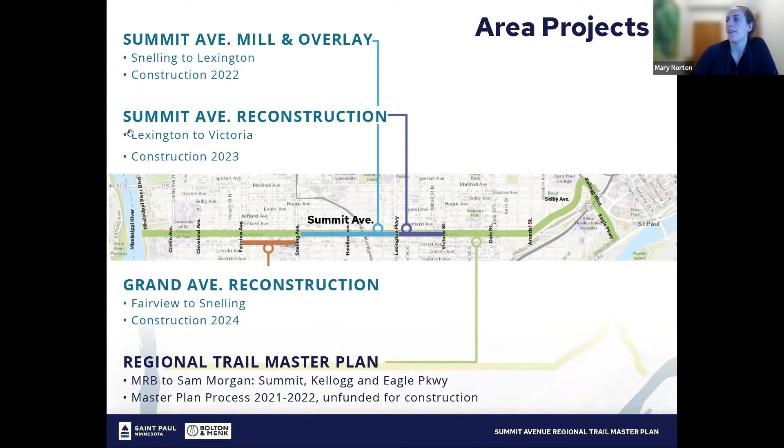Touching a little bit on master plan areas - when we talk about the regional trail search corridor, that's the envelope. We're then dialing in on Summit Avenue itself, and how Summit Avenue is characterized. Generally speaking, the right-of-way conditions for Summit Avenue are characterized by two right-of-way conditions: there's a 200-foot right-of-way from Lexington to the Mississippi River Boulevard.

East of Lexington, we have a 100-foot right-of-way. So two different available right-of-ways that we're working within to chart what this regional trail facility could look like and how traffic and operations are moving in there. But generally, those are the two characterizations of the corridor.

When we break that down further, in that 200-foot right-of-way, there's a single median condition characterized by a really large 90-foot center median. We also have double median conditions - there's a stretch where that center area splits, becomes two different medians, and then comes back together again before it hits Lexington, back to a single median.

So a little bit unique, obviously makes for very unique transitions and things we want to be mindful of as we're designing and making sure that we can create safer transitions through these spaces for bicycles and pedestrians.

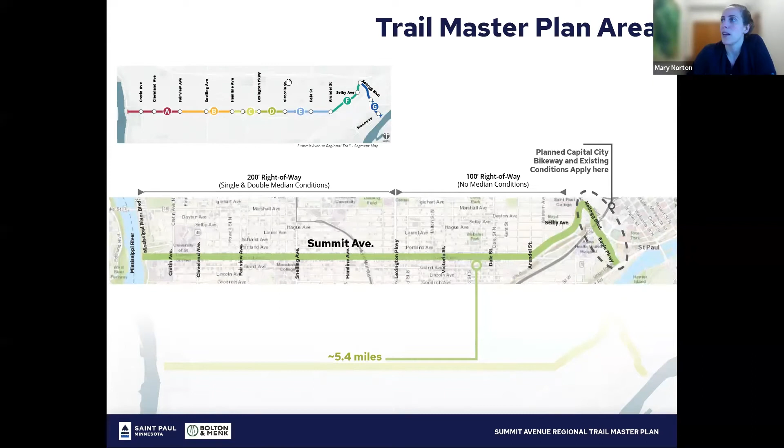It's a 5.4 mile corridor. In the upper left here, when we get to the actual master plan document this summer, when those are under review, we'll start to break down areas by A, B, C, D—that's just a keynote for reference. We won't get quite that granular here today; we'll mostly look at the two different types, 100-foot and 200-foot, but just as a note for when the master plan document comes out, we'll move along that way.

So some of the project goals and context here. As I mentioned, it's a really important link for the Parks and Trails Network in the metropolitan region. We're really looking to balance many of the priorities that exist within Summit—ways to balance needs for traffic calming, safety improvements, and identify how we can also modernize infrastructure and bring a more improved connective space to public open space there. We recognize Summit is an incredibly important place, and we want to make sure that whatever goes in really complements and fits with the historic character of Summit Avenue. So really being conscious about what is planned and proposed, to really come alongside what is great already.

The project schedule: in the fall we kicked off community engagement, and through the winter we've been looking at existing conditions and analysis, and really connecting with stakeholder groups, building our design advisory committee with representatives at various district councils and community stakeholder groups—really identifying where corridor opportunities and constraints are, trying to understand those transition areas and where traffic concerns are, or where we know we need to plan for improvements.

Then in winter and spring, gathering feedback from community groups has been really important. The Engage St. Paul website has been very helpful in understanding where hotspots are, where people see interest in improvement, or where they want things to stay as is, or where we should improve upon that. Now we're really shifting for summer to develop these trail concepts and get feedback, and then get that draft master plan out in summer for public comment. Once we get feedback on it and refine the master plan, we'd be looking to move through approvals this fall.

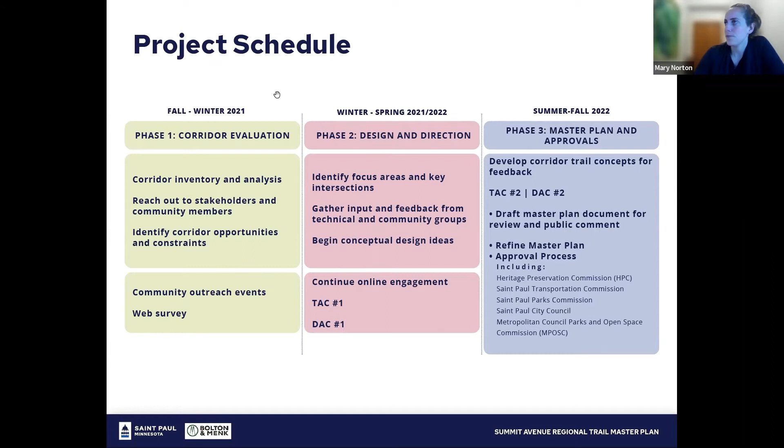All right, touch on evaluation. We'll make sure to keep a little time check—we want to move along here so we can get the conversation going.

There's been a lot of great community engagement that's been a part of this process. We're hearing from many different community members—certainly huge priorities in green space protection and preservation of what exists in the corridor. Really seeing the parkway function as a park experience and the importance of that, making sure that's embedded in this process, and that we continue to complement that as we move forward with design ideas.

Safety: a lot of concern about cars moving too fast, proximity of pedestrians to vehicles, crossings in particular being of concern, and turning movements. Really a desire for more separation between cars, bicycles, and peds, door swing conflicts, and things like that with existing bike lanes. And then a lot of concern about facility conditions—paving the road is a big concern. Surface conditions being poor, and wanting that to be a better experience and increase use that way.

Walkway and paving conditions as well, tripping concerns, things like that. The wider sidewalks east of Dale, that character in the corridor is really highly desirable. The pedestrian realm is really important.

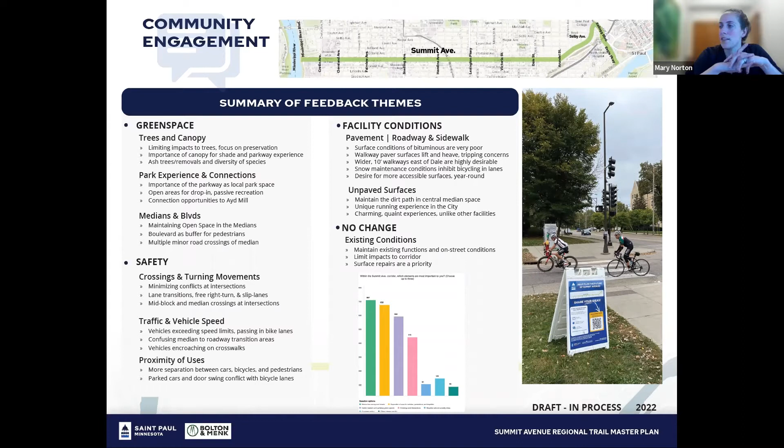And then no change - very concerned about changing the corridor, keeping things as they are. There's certainly an important function to the historical context and the parkway context of the corridor. So making sure that surface repairs are the priority. We're hearing quite a bit from many different perspectives on it. It's a well-loved space, and we want to be conscious of that.

I will touch on some of these hotspots from the online survey, where we're seeing people show interest in improvements or areas of concern. I think in general, safety at intersections is really important.

The value of park and green spaces - spaces that are either currently well used and loved, or ones that are underutilized - where people see Summit functioning as an important connection, creating more opportunity for green spaces and bringing people to those spaces. So connections and transitions too.

For example, the Ayd Mill - a lot of desire to connect to that current or recently designed bikeway, making that a more accessible experience. And then parking functions and conflicts, certainly near universities where there are conflicts with on-street bikeways adjacent to parking, or in between through travel and parking.

So survey participation has been good. I think we have a little over 800 participants in the survey across community members. Again, we'll keep that door open and want people to continue to engage through that. But here's kind of a breakdown of who's participated so far.

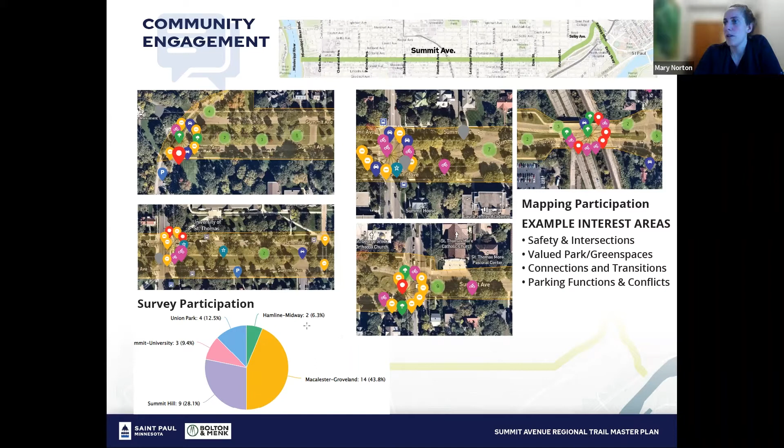A lot of community engagement conversation happening too - huge concern about trees and planting. Again, I want to reiterate that is integral to this process. We certainly recognize the importance of that, and what you'll see in these concepts - we're really moving to keep that as a priority and complement that.

Concerns about traffic and pavement, curb walks, crossings at the median - people going from median to median, so to speak - as a concern. Just a touch point on that. Again, reiterating that green space is integral to the design.

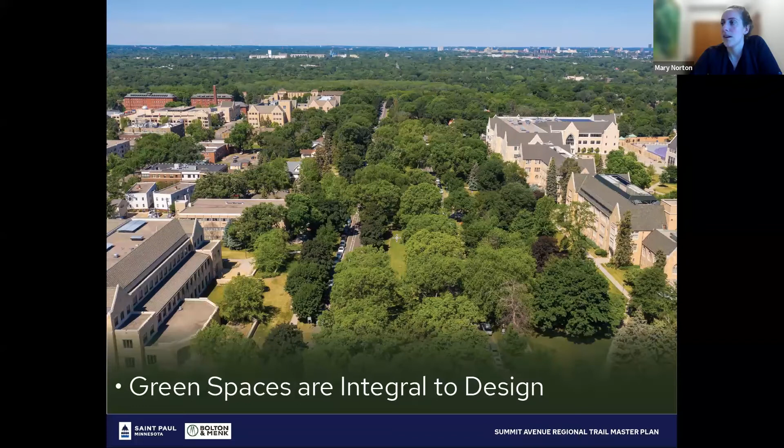What you'll see here when we get to the concepts rolling out is really focusing on the existing paved space and where we can create or reallocate more pedestrian and bicycle friendly facilities, making sure that we're really conscious of that edge and where those edges of curbs are to maintain green spaces and making sure that's integral.

The medians themselves, again those sort of user-driven pathways, have endured time certainly - we've seen that in aerial photographs dating back. I think that's a really important space and will continue to be. So again, we're going to be looking at these paved areas and how they function, how we can bring people up to create more of a separated bikeway, but within that paved surface.

Just to touch a little bit on the historic district - there are two different historic districts spanning Summit Avenue, the West Summit Avenue Historic District and the Historic Hill District. We know that the historic context is incredibly important, and whatever changes are made certainly are part of that.

I'm really looking forward to hearing from our friends on the call from SHPO as well as HPC, who can speak to where these ideas might be headed and how that historical context overlays with this. In our historical analysis tech memo, the grand and noteworthy public street is a factor from early planning.

This is certainly a cultural landscape - we can see that 100-foot pattern and the 200-foot spatial pattern dating back to 1888 in the early layout and Sanborn maps. So spatial organization of land patterns is really important, and we want to be conscious of that.

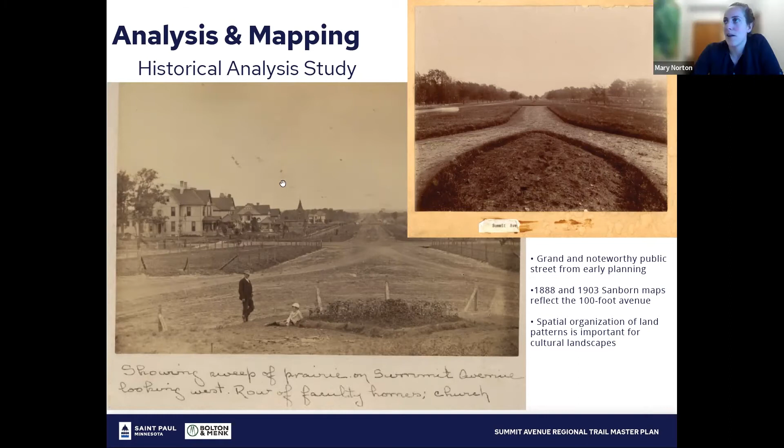Again, just reiterating the importance of the green space in this corridor, the urban canopy. I think the shadows that are created, what this place does to create really a highly desirable park and parkway experience for all modes and users. We want to maintain that and we want to make sure we're complementing it.

Existing conditions, the Ayd Mill Bridge I mentioned as a fairly recent reconstruction in the corridor. And the desire for connections to that as part of planning processes, recognizing an opportunity for bicyclists and pedestrians to connect to other parts of the city.

Touchdown surface conditions and paving. I think this particular image is Lexington to Victoria. So certainly interest in reconstructing and modernizing those conditions where we can. The upper right here, you'll see that kind of 10-foot sidewalk characterization, the beauty and comfort of that 10-foot pedestrian realm that exists east of Dale is highly desirable.

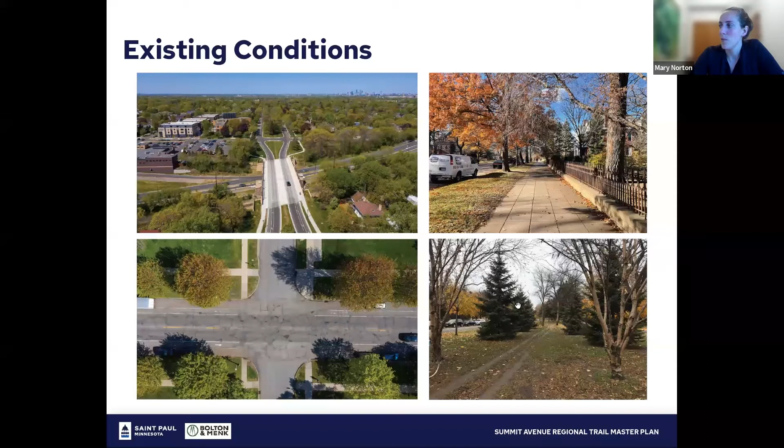And again, those sort of user-driven paths through the park landscape is really important. I'll switch to some of the concerns we've heard from a maintenance perspective, certainly in winter. Summer conditions, it's probably more about proximity, speed of cars and proximity to parked cars.

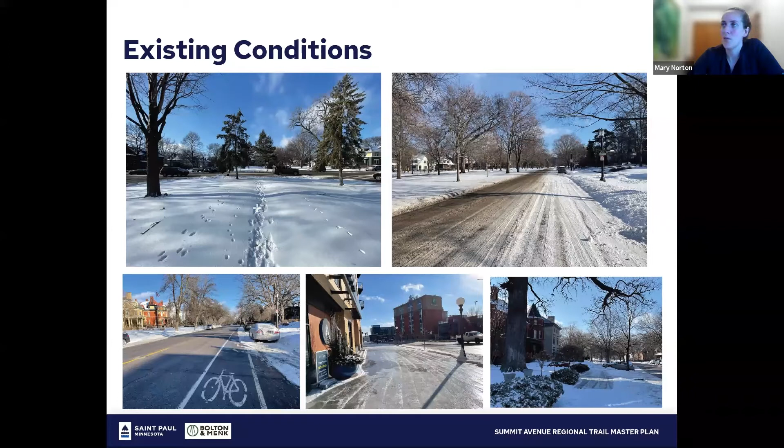But in winter conditions, there's certainly concern of snow removal and being able to utilize these facilities year round for bicycles and pedestrians. And certainly it's used as soon as the snow falls, so people are out, people are moving on it. It's a great community space.

And with that, I want to transition to trail concept evaluation objectives. So we are really trying to seek a balance of many different objectives in the corridor. There's a lot of competing priorities, of course.

A large priority is to increase pedestrian and bicycle safety and create a comfortable trail experience that can really be an all ages facility, kind of meet that 8 to 80 need for bicycles and pedestrians to be able to enjoy Summit Avenue and enjoy that parkway corridor.

So we really want to support it. It already is a high quality experience in this corridor, and we want to make that a high quality regional trail experience as well, making sure that whatever's proposed is compatible with historic context.

Where you're going to see in these concepts where we're starting to have challenges in design, or beginning to weigh a little more, are these impacts to vehicle parking and functions.

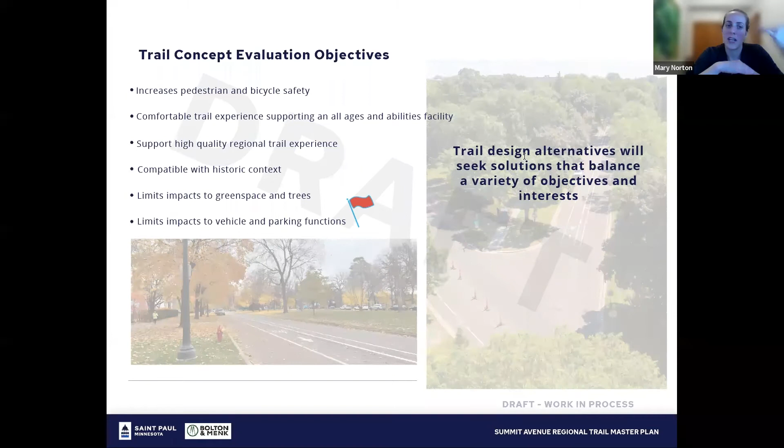You'll see that kind of play out in the concepts and in options where we have an option to retain some parking and an option to remove parking in select areas to create the trail space. So you'll see that play through, but again, really trying to seek that balance of meeting as many objectives as we can and minimizing impacts where we're able to.

A little bit deeper dive on parking. So another study, in addition to some of the historic context that was studied earlier this year, is a parking evaluation. There are actually 2 studies that have been done at the city relative to parking. One as part of the master plan, and one earlier in January 2020 that predates the master plan.

That was an overnight parking restriction study. This was in response to a study for improved roadway maintenance for facilities on Summit Avenue. This looked at corridor-wide parking and hours collected.

Again, it was an overnight parking study, so 12 a.m. to 6 a.m., in July through September, on 6 different occasions, kind of looking at general utilization rates.

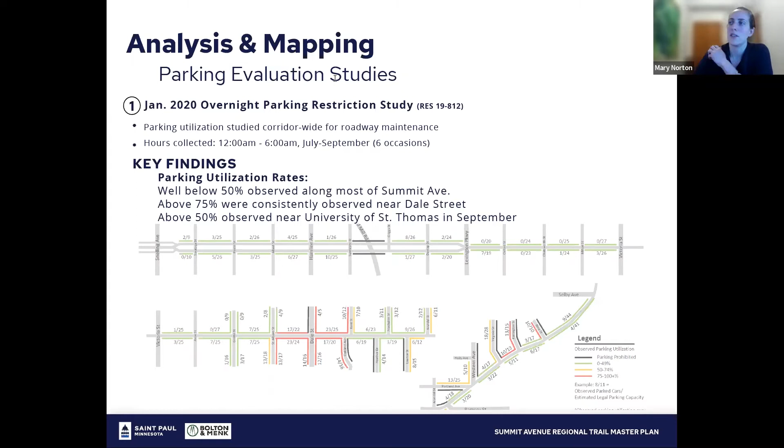Overall, parking utilization for this overnight study was observed well below 50% along most of Summit Avenue. It was consistently above 75% near Dale, and then above 50% near University of St. Thomas when school was in session. So a few different snapshots of utilization corridor wide.

The second parking study was an analysis specific to this master plan, where we took another look, especially in the 100-foot right of way where we know we're most constrained. We wanted to see a snapshot of parking and utilization. So parking utilization here looked at Lexington to Selby.

8 different collection times occurred as part of this study, and key findings were that in this part of the corridor utilization was generally modest, probably averaging about 30% over the whole study area. Consistent with the previous study, the area near Dale was consistently a high usage point.

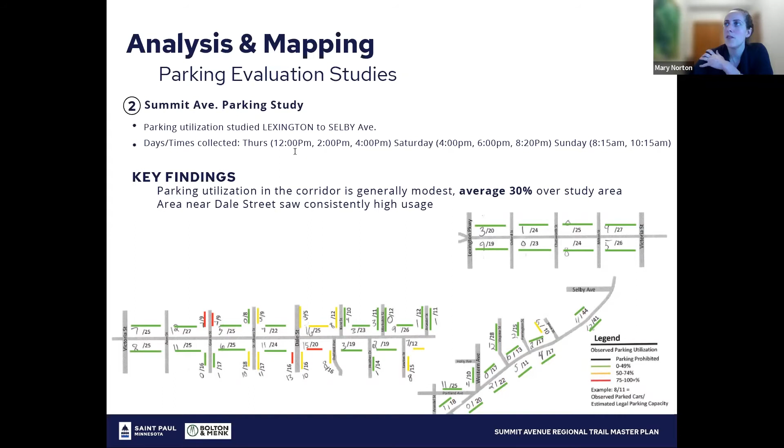So given those preliminary studies, we're starting to look at these paved surfaces and how we can prioritize green space and preserve that mature landscape. I think that's something really important about Summit Avenue that may be different from other places. There's a lot that's amazing and different about Summit, but the mature landscape features are really important as we start to look at those curb edges. We want to be conscious of minimizing that movement because of mature landscape and critical roots, so that's a big priority.

We're looking to reallocate existing transportation spaces so that we can provide a separated bikeway and walkways as part of that regional trail facility to serve bikes and pedestrians.

A key component to all concepts you'll see today is the idea of retaining parking on both sides, or potentially removing it on one side, and what that could look like. The other key piece is two different trail styles, each pretty different. One is a one-way style trail facility, complementary to what exists now on street, but brought up above the curb to provide more separation between vehicles and bicycles.

So the one-way trail style facility—excuse me, let me find a glass of water. The one-way style is looking at how that shift would occur. What you see here on screen is in that 100-foot right-of-way, our narrowest right-of-way condition. That shift could occur potentially on one side, or 50%, so to speak—it doesn't necessarily have to be all on one side. The traffic could work so you have a break mid-block and are able to transition those facilities as needed.

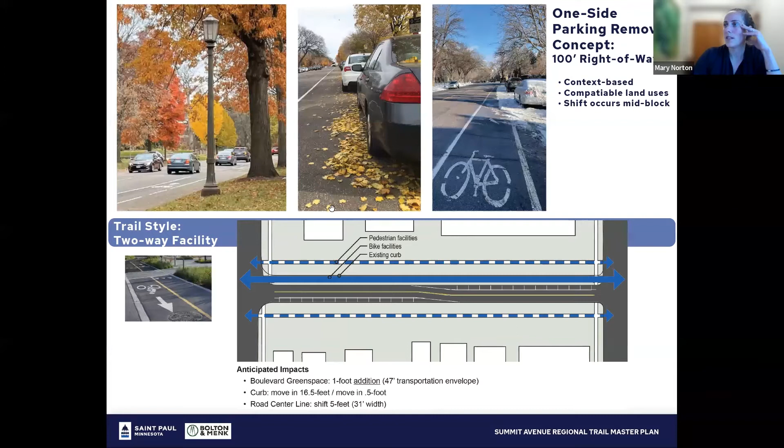So it's a context-based approach to parking or reallocating parking. The one-way style shows two one-ways, or a paired one-way style facility, similar to what's out there now. The next one, the two-way style, is a little different: both bicycle directions are on one side, and the sidewalks remain as the pedestrian facility. The same strategy could be used for parking to chicane throughout that section.

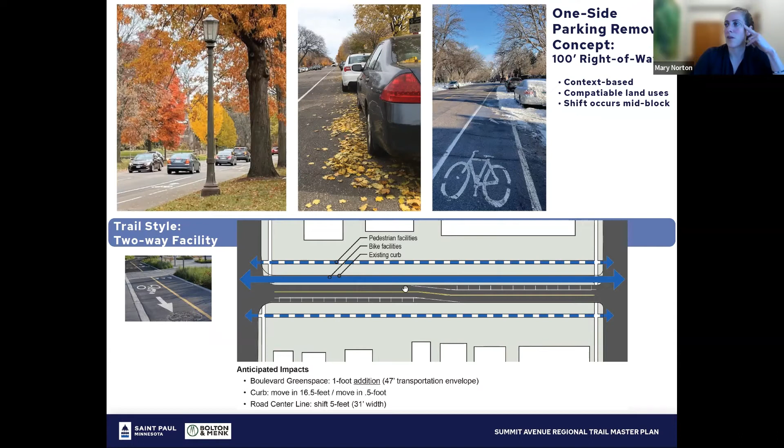It's worth noting this is a diagram, but this wouldn't occur on every single block—you could span it as needed. It's more of a context-based look that could occur relative to where parking needs are to be met. So that is that concept, and with that I'll shift to the conceptual bike trail alternatives we're looking at.

There are two different facility types you'll see play out: the one-way style facility type and the two-way style facility type. We'll run through the 200-foot right-of-way first—that's the area with the large medians and double medians. So let's look at existing conditions in that 200-foot right-of-way. In the upper right there's a key marker of where these conditions exist in the corridor, and then we have a generic space here representing that 200-foot right-of-way.

Zeroing in on these one-way roads, framing that center median space, we're looking at this paved area and how we can reallocate it to create trail space.

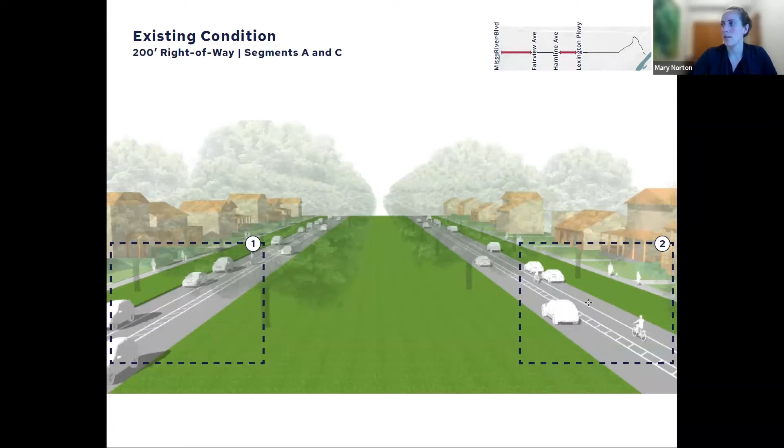In existing conditions, we have an on-street buffered bike lane between parked cars and a through travel lane, but there's sufficient area to create a buffer for the bikeway on street. You'll note in the legend on all these graphics the existing curb line and the potential impact zone—that's where we're thinking about those curb edges and how each facility type moves and adjusts them. We want to minimize that movement as much as we can, but also need to create a trail facility that's comfortable and meets design guidelines, as well as roadway design guidelines for parking, through travel, and emergency access.

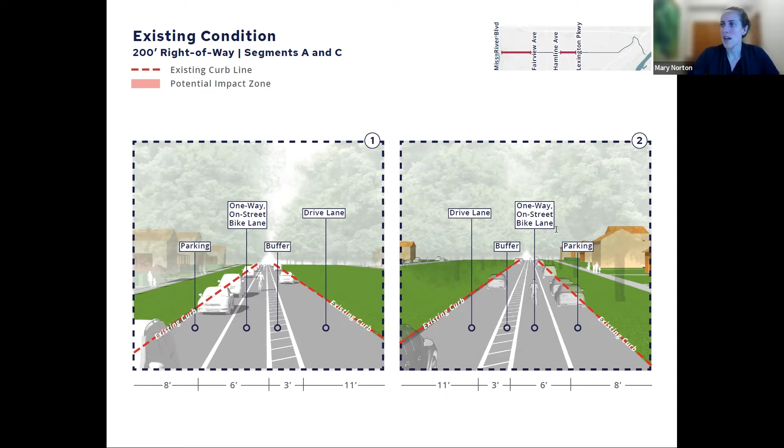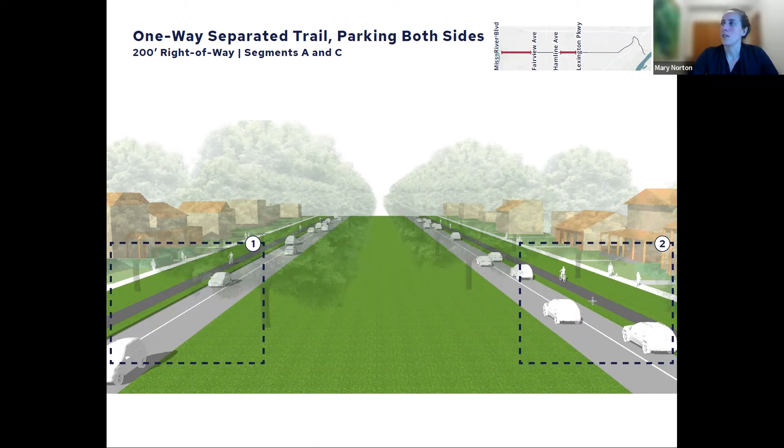So here's the one-way pairing in this section, an example of a one-way separated trail with parking on both sides—keeping parking and roadway functionality as is, and introducing a one-way separated trail on either side, as reflected here in area 1 and 2, with the center median. Our impacts will start to show in red; they vary, but generally this particular style would be looking at 1 to 2 feet of impact. I'll say too, to my colleagues, feel free to jump in if I miss something or need another sip of water.

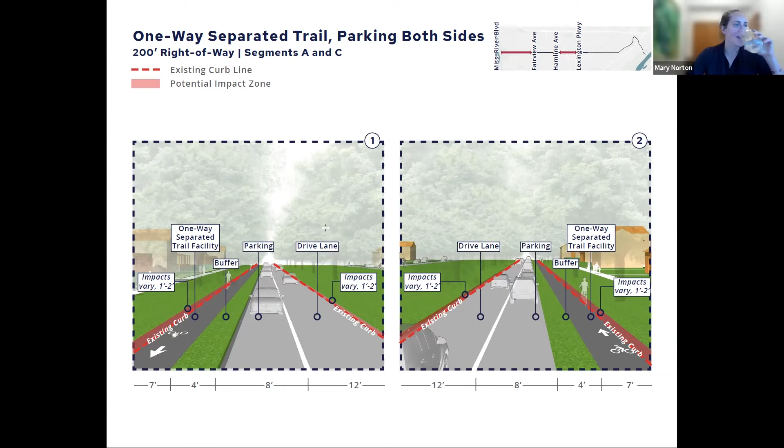The next one we'll look at is a two-way separated trail with parking on one side. We have that same 200-foot right-of-way. So functionality remains on one side, but it looks at removing parking on the other side, maintaining those existing curb lines. What's interesting about this design is it provides an additional green space on one side and maintains the existing curb lines as is—a little bit different style or functionality.

Something that's going to repeat in all of these standards is a buffer. We need about a 4-foot buffer for maintenance on all of these, so you'll see that edge called out as a buffer. It can vary depending on if we have space—we can make it wider—but at least 4 feet is necessary for maintenance.

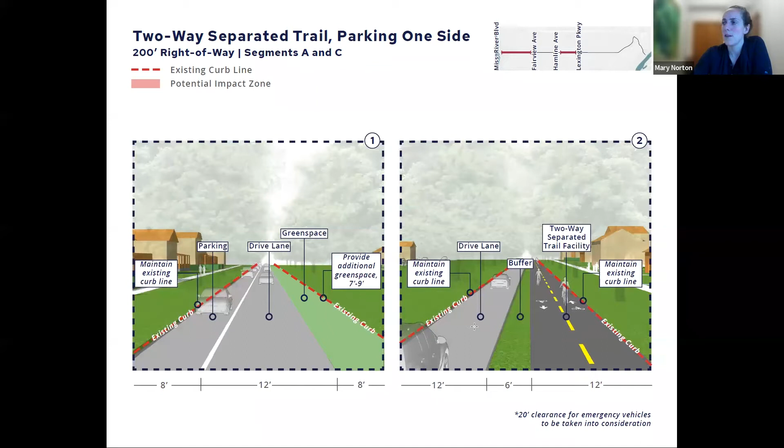All right, 200-foot right of way. Now we're looking at the double median. This is the situation where we have the large 90-foot median, and then it splits—we have those unique transitions where through traffic comes through the middle of the medians and we have frontage roads on the outside. We'll share what those facility styles look like here. Your main through travel is between the medians.

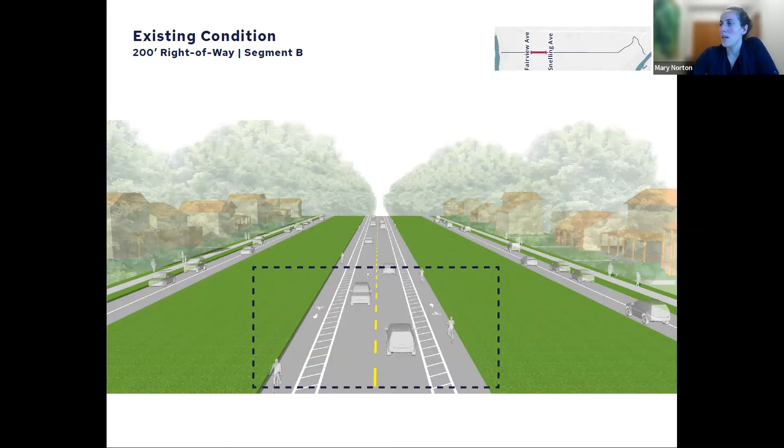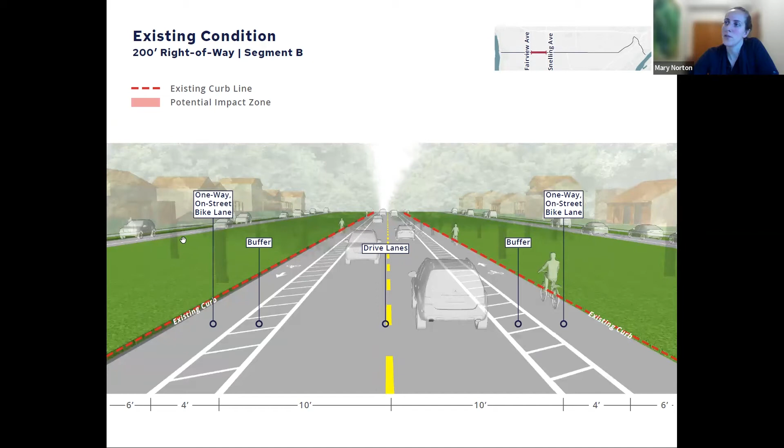Current conditions are on-street bikeways. We do still have those buffered bike lanes, held tight to the curb. Parking does not exist in this center area, however it does exist on the frontage roads in this particular segment.

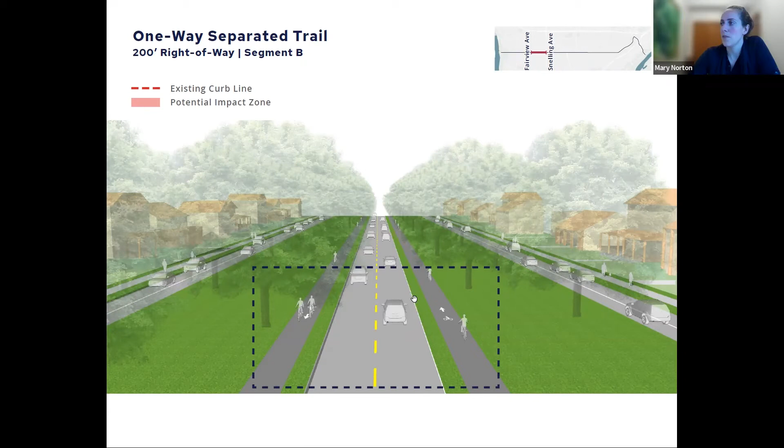Looking at a one-way separated trail with a 200-foot right-of-way, we have similar functionality to what is there now, but bringing those spaces up above the curb and providing more separation from vehicles. These are shown at about a 7-foot width, partly for continuity of the recreational style facility, since many riders like to ride side by side or need room for passing.

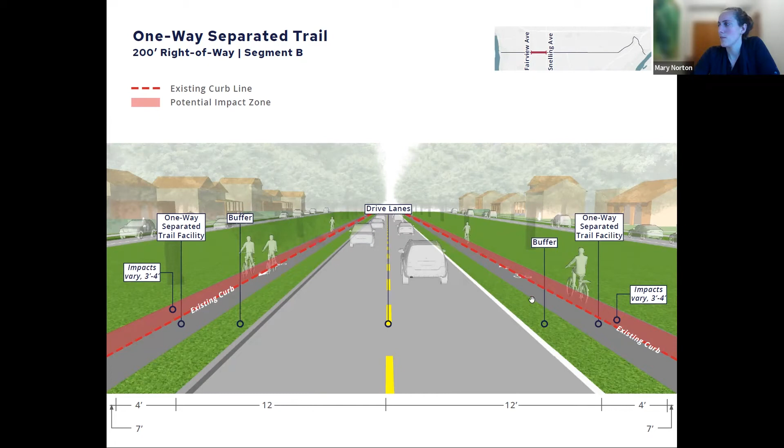With this one-way style, we start to see impacts of about 3 to 4 feet on either side while maintaining that 4-foot buffer. Don't worry if all of this isn't sinking in—it will be on the mural board, so we'll dive in a little further, but I want to give folks a preview first.

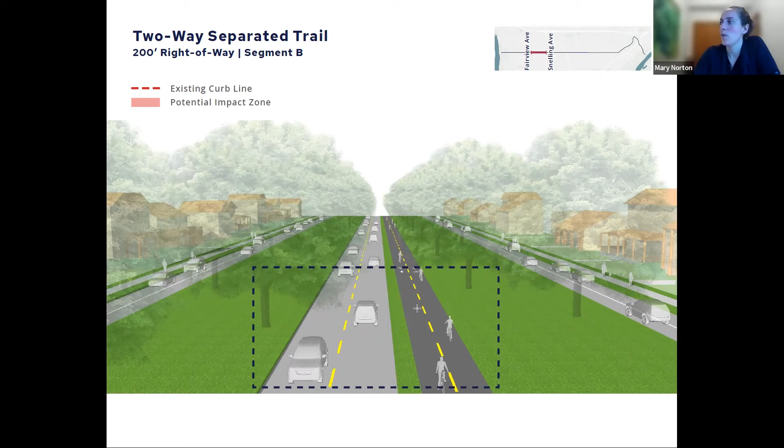So the next one is the two-way style facility, the two-way separated trail—again focusing on that center area, but bringing all uses pulled to one side within that center space. What we see here, because parking isn't present, is we can shift those drive lanes over, create a buffer, and have a two-way trail while maintaining our existing curb lines to work within that envelope.

The 100-foot right-of-way—so from Lexington Parkway to Kellogg Boulevard. Here's where we start to narrow down. We're beyond the median; we don't have a median here. We'll start to take a look at what those one-way and two-way style facilities start to do.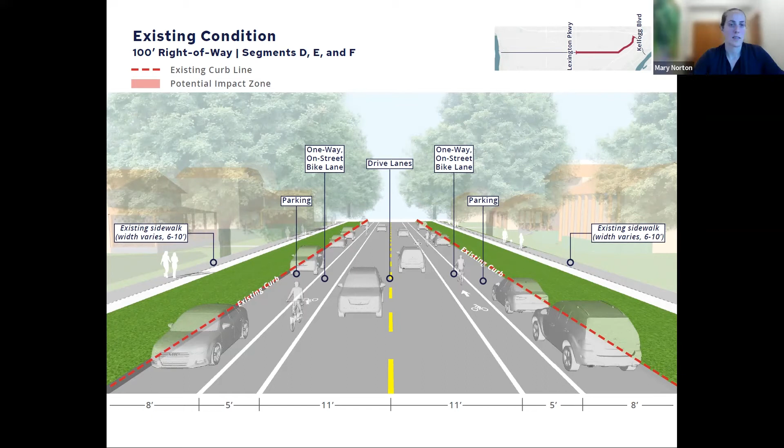Existing conditions—here's where our striped buffer that exists on the others does not exist. We have our 5-foot on-street bike lane between parking and through traffic. It's worth noting that the sidewalk varies in this stretch: east of Dale we have those 10-foot walks, and west of Dale it can be 10, but primarily is a 6-foot walk. That's important to note because those pedestrian realms are certainly part of this regional trail facility. We're just focusing right now on the bikeway design and where improvements can be made.

The one-way separated trail—how that would overlay here—you can see parking on one side, so one side of parking, or that chicane can occur, but about 50% of the parking, so to speak, would be removed and maintained on one side. Impacts vary with this one-way style facility from 2 to 3 feet, and again that same buffer exists here.

This next one is not recommended due to potential boulevard impacts, but we want to share it for the sake of the items we're looking into and how it would overlay. This is maintaining parking on both sides, which starts to get more significant impacts to that curb edge. Again, reiterating the importance of that curb edge and making sure we're minimizing how much that's moving—this starts to get into 6 or 7 feet. It's not recommended because we're dealing with a mature landscape and want to minimize that curb movement.

So that's what a one-way style would look like if parking remained.

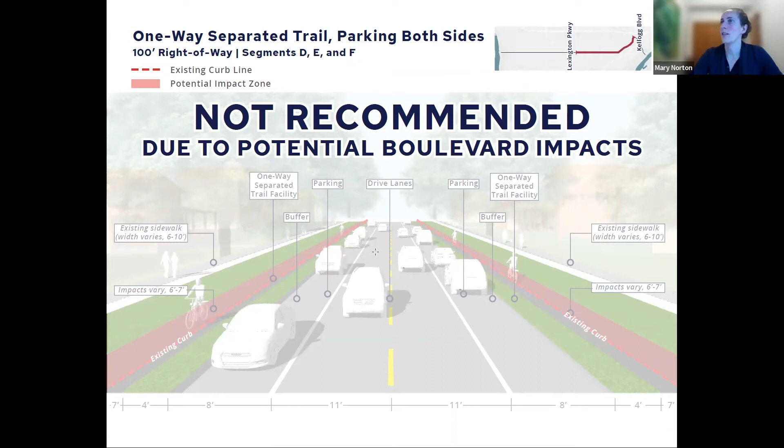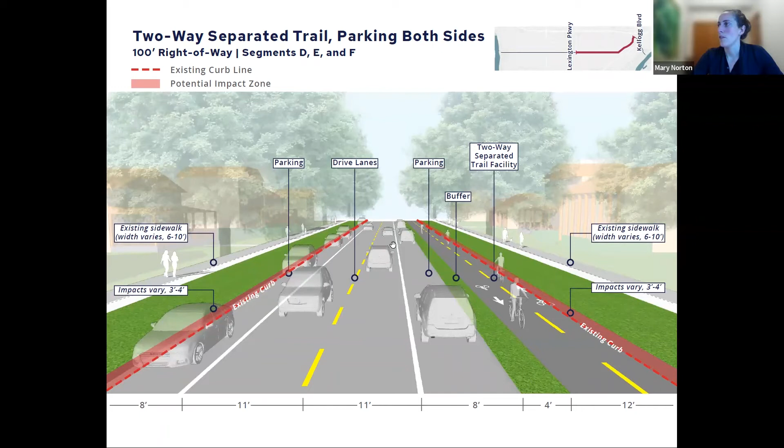The two-way trail, keeping parking on one side, we're able to create again a buffer, a two-way facility, but maintain the existing curb line. And then if we keep parking on both sides and have a two-way style facility, we have lesser impacts to that curb edge. We're more in the 3 to 4 foot realm to be able to keep that functionality and maintain parking.

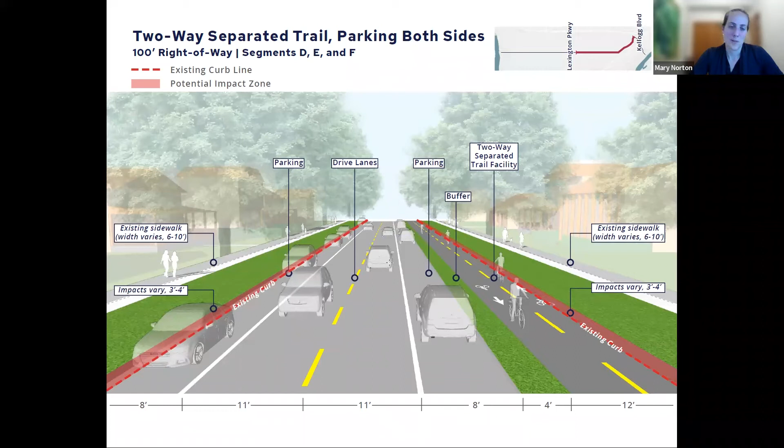I know it's a lot of content, but again those will be available in the Miro boards and our smaller groups. We'll start to look at that and talk through the benefits and drawbacks of all of these as ideas and just hear what people think.

So with that, I think we're going to structure it into 2 main groups. We'll keep the 200-foot right-of-way folks together. That group will be led by myself, Cody, and folks will be there, and then Scott and Katie will be in that group facilitating conversation. The 100-foot right-of-way will be characterized by Brett, and Maddie will be leading the way on that one. So we're going to have 2 big conversations.

I believe it'll automatically split, right, Michaela? Yep, correct. Once you're ready, I'll open all the rooms and everyone will automatically be put into their breakout room. Okay, that sounds good. So we'll do about 30 minutes or so. We could probably run a little longer since we're going to have two rooms. We were going to do 3 at one point, but Michaela will be our friend and jump in and help us make sure we're on time and keeping us rolling.

So with that, I will see folks on the other side in group A. And Brett and Maddie, you guys will see folks in group B. And then we'll come back to the main space and we'll all report out and share what we learned.

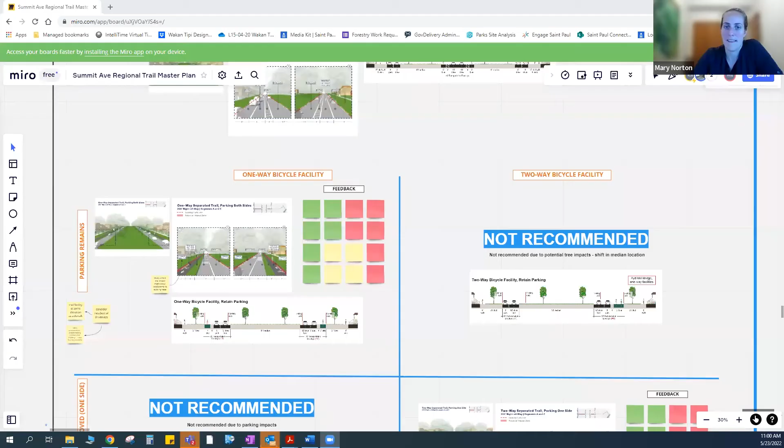I know we didn't get a volunteer in our group to report out, at least at this point. Last call, anyone from group A that wants to summarize the high points we talked about? If not, I'll play that role. All right, fair enough. Okay, so in group A, we were talking about here — I'll share my screen here shortly. All right, so everyone see that okay?

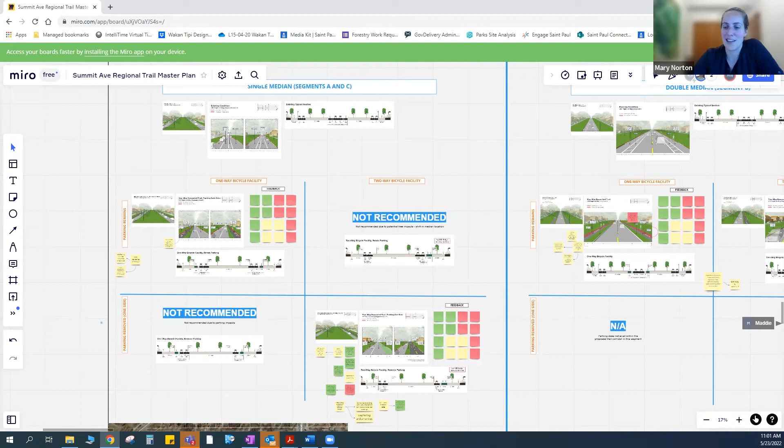All right, so group A, we had a great group. We were talking, we didn't make it all the way to the 100-foot right of way. Unfortunately, we were working through the medians and all that good stuff. But I think some similar themes emerged.

So on our one-way bicycle facility, as we looked at the median spaces, we talked a bit about those relationships to the curb. Forestry brought up that certainly east of Lexington, we have a little tighter conditions or more mature landscape — the specifics aren't there, but something to be conscious of east of Lexington. The consideration of residential driveways, so how these trail facilities would function at driveways, and where we would have more potential conflicts in those scenarios would be with a two-way style facility. So from the different types of facilities, when you have counter traffic, that was flagged as maybe a less desirable situation from the traffic flow perspective, the two-way facility.

Let's see, what else? I'm chasing our post-it notes here. We had a lot of good conversation around the two-way style facility.

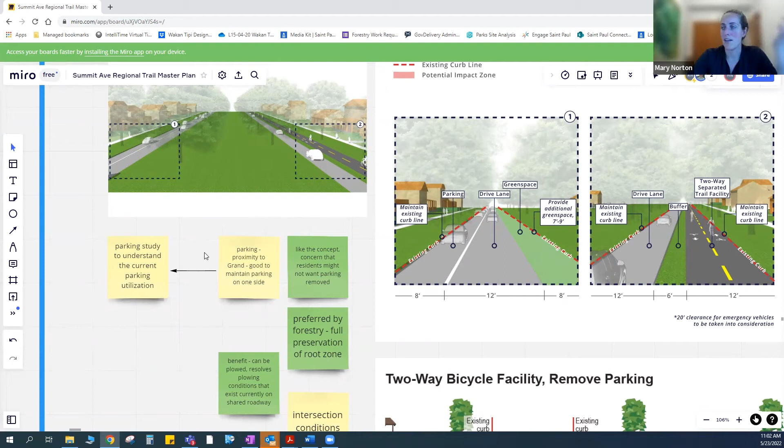Understanding that parking is really important, and parking proximity to Grand is important. It sounded like it was a good thing that at least some parking functionality is maintained in all these concepts. It's not necessarily an easy situation, but eliminating it entirely would be very problematic.

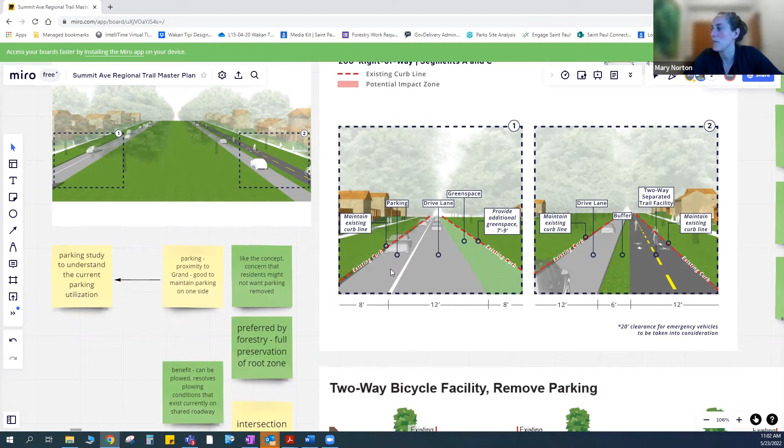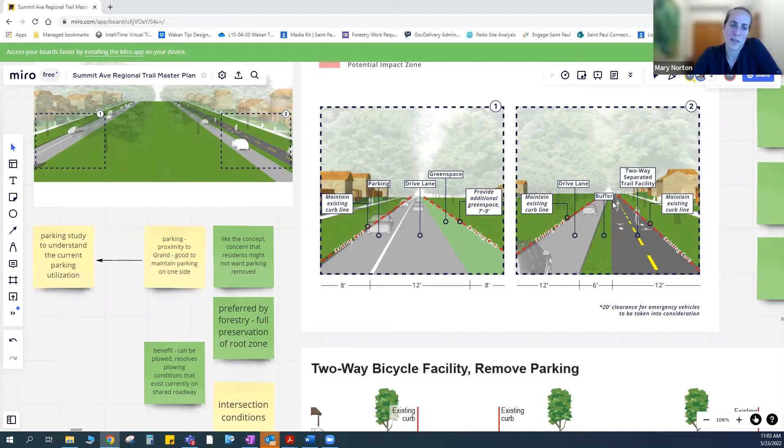What else? We talked about the benefits of the regional trail facility being maintained year round versus what exists currently, and then creating more space or more separation, that buffer space we talked about a little bit.

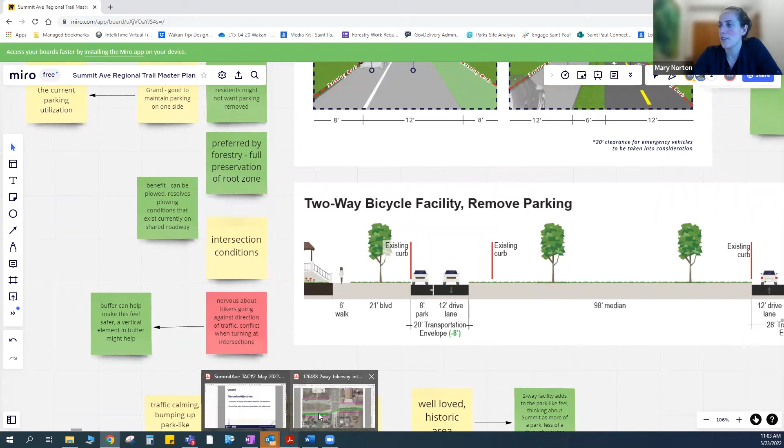Again, kind of nervous about biking against traffic. So going-in-traffic conflict was something we took a look at in general, kind of how a two-way style facility could function.

Is that showing up on screen, by the way? Okay, there's kind of a traffic diagram. So we looked a little bit, we don't have one of these illustrated for the one-ways. The one-ways would follow similar transition patterns or function patterns that are there currently.

So just trying to understand, if we were to push a two-way trail facility to a side, how that would transition, especially in areas where we have a large median to a double. How would that improve crossing conditions at Snelling or other transition points in the corridor? Lexington being the last one we looked at, pulling that over and bringing these together on one side and creating a designated crossing there.

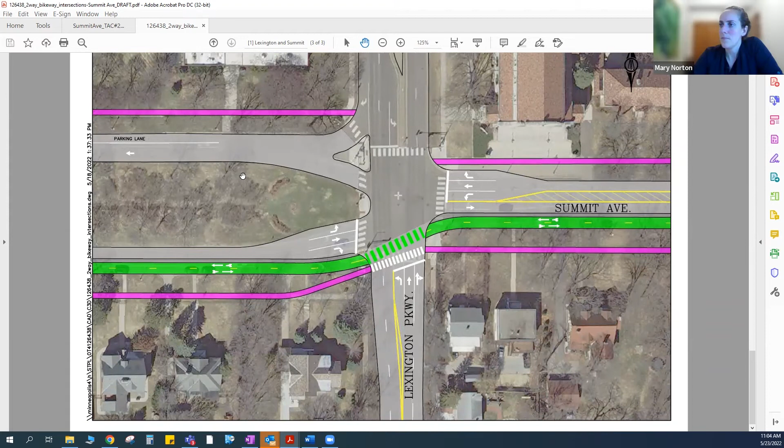So I'll jump back to the Miro board. I'm trying to think of anything else.

And then at the end, Karen, thank you for speaking to that interest in the park-like experience and the potential to close unsignalized crossings and really connect more green spaces together. The importance of it being a well-loved historical area, and really bringing that park, people-first experience back to the corridor, was something people were interested in.

Anything I missed for my group? Anyone want to chime in? Some of the high points?

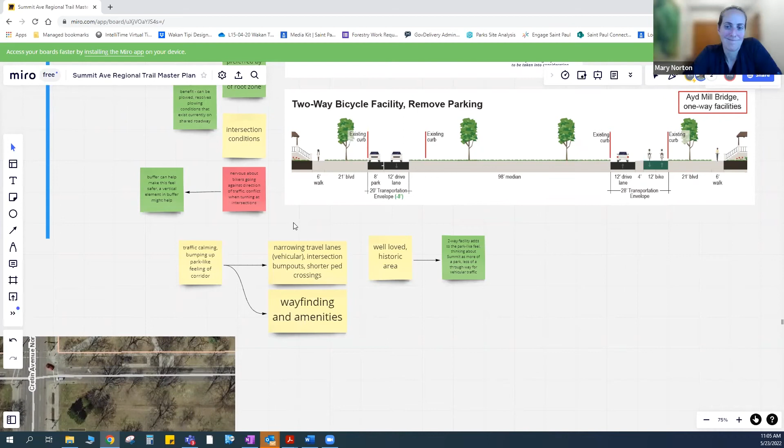All right, and with that, I'll turn it over to Group B. Share what you learned in Group B. Sure, this is Jimmy. I have some notes here, but rest of the group, feel free to jump in.

We started looking at the 100-foot right-of-way. I think in both the 100-foot and 200-foot, Capitol Region Watershed liked the two-way because of its limited impact on green space.

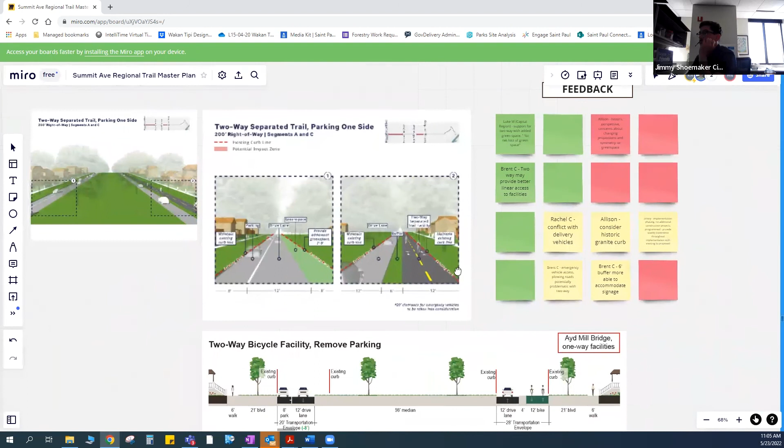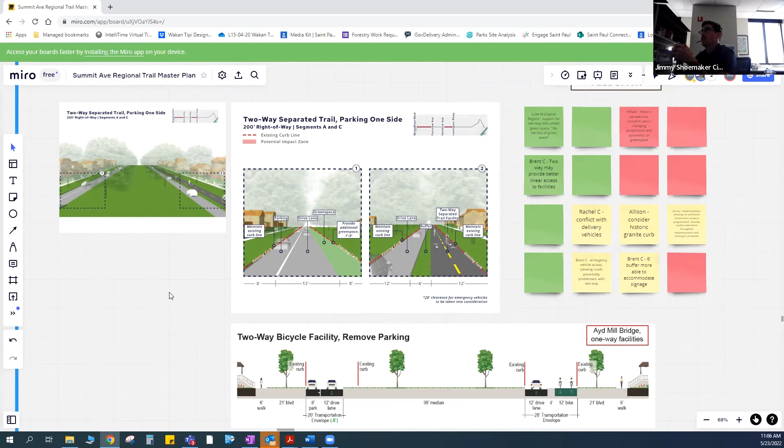I think there was a question about how adding green space changes the historical character. Allison mentioned that, in whatever way it shakes out, if we're adding green space and it creates an asymmetry from historical preservation, that could be an issue because the symmetry is actually part of the historical character.

Some other folks mentioned, when we have 12-foot drive lanes, how do emergency vehicles or delivery vehicles function? If there's a median there, does that mean they're loading or unloading in that one vehicle lane?

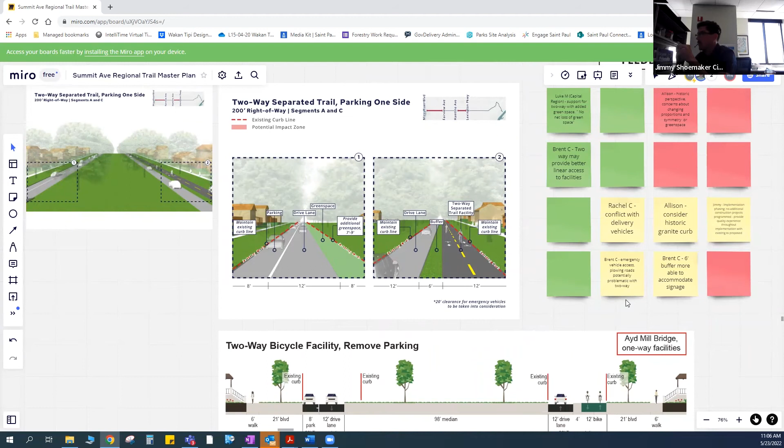Also a question about how the different users, even the sub-users, of bicyclists operate or use the corridor. So if we change how it currently is, how do different users and even sub-users of the same mode of bikers use it?

There was some discussion about safety concerns from one-way versus two-way. Mary mentioned that, but Public Works Traffic mentioned that, for left-turning vehicles, it's easy to understand in a one-way when a biker is coming towards you, but if a biker is coming behind you and you're taking a left, there's some concern there. Maybe people might eventually figure it out, but it is a change regardless from what is currently out there, and so that could be a learning curve and potential safety concern.

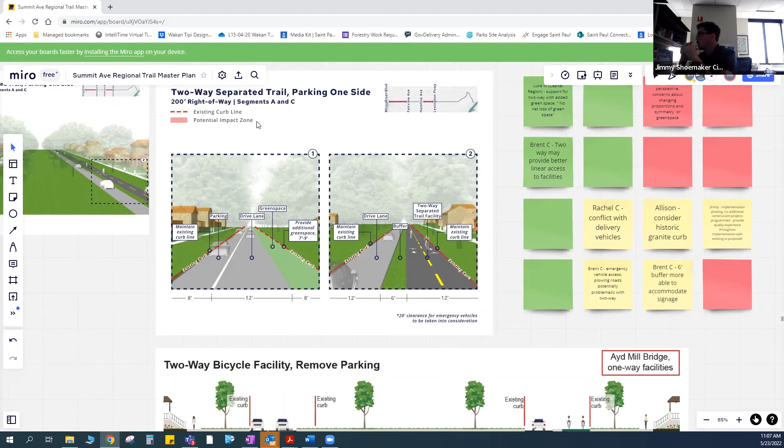There was just a note from Gold Line Metro Transit on the call talking about how St. Thomas uses Summit for turnarounds and layovers, I think, or used to or currently does, and then just how Metro Transit crosses Summit with their different lines. I don't know, what else am I missing, Group B?

Yep, I think that was a pretty good overview. And I think to Jimmy's comments, we had some similar comments across the segments that we looked at. We also had very limited conversation about the 100-foot right of way, just because we ran out of time. But yeah, a lot of the conversation was around driver expectation and what's expected.

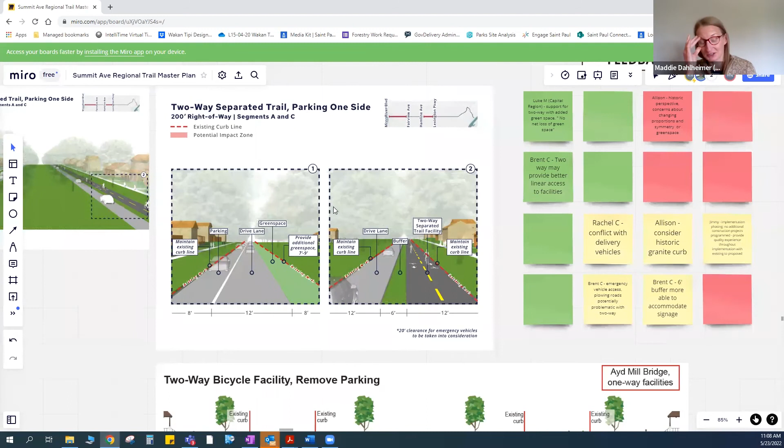I think to build on what Jimmy said, talking more about exploring who is the anticipated user and therefore which facility type would be most welcoming to that user group, or who are we creating this for, and how will this support or not support that. Going even further, who are we anticipating, and who do we want to use it? If we design a certain facility, it would encourage or entice some people to use it, whereas another facility might not.

We also talked about implementation that came up of, we want to create a high quality experience for the whole length of the trail, and knowing that we only have the one segment currently scoped for a construction project, how do we make sure it's still a high quality experience in the interim before the trail is realized across the whole extents?

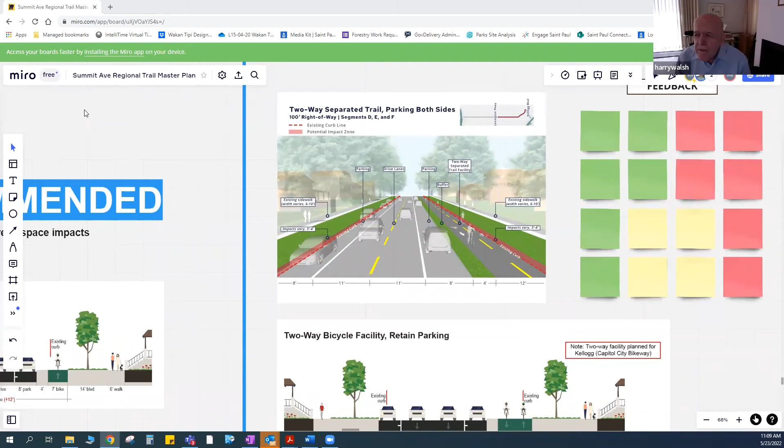There's been no discussion at all of the different winter conditions. We've been talking as though it's perpetual summer around here.

Yeah, I think one thing our group also talked about was the maintenance requirements for a two-way and one-way, but also kind of what might be expected in winter use, where if you have a very heavy snowfall in a one-way use, maybe the snow would cover the one-way cycle track, whereas in a two-way it would only cover half of it.

I think from the project team side, maintenance is certainly something we're looking into, both with the width of those buffers, but then also what's the maintenance of the regional trail, knowing that it would have to be maintained in a clear and usable state.

Yeah, I don't know if, to say that the snow would only be thrown on a two-way for half of it, I don't know if we should call that a benefit. We should maintain it and make sure it's rideable, one-way or two-way, as opposed to saying half of the two-way is covered by snow and that's acceptable. That was just kind of an offhand comment that was made, but certainly, Jimmy, you're right. If we're creating a regional trail, there are certain maintenance expectations that follow that.

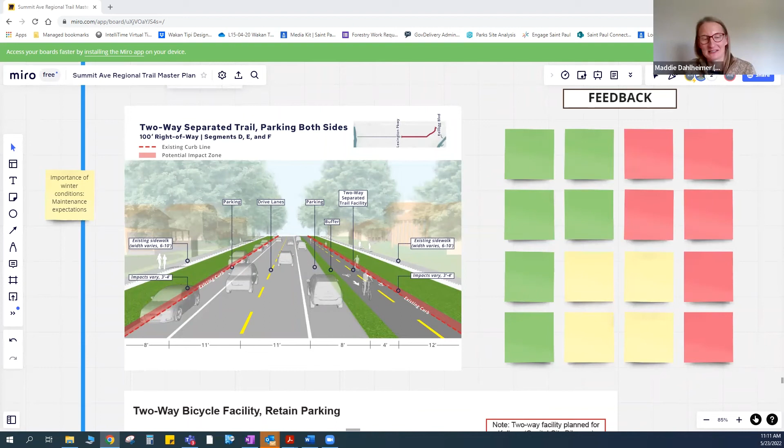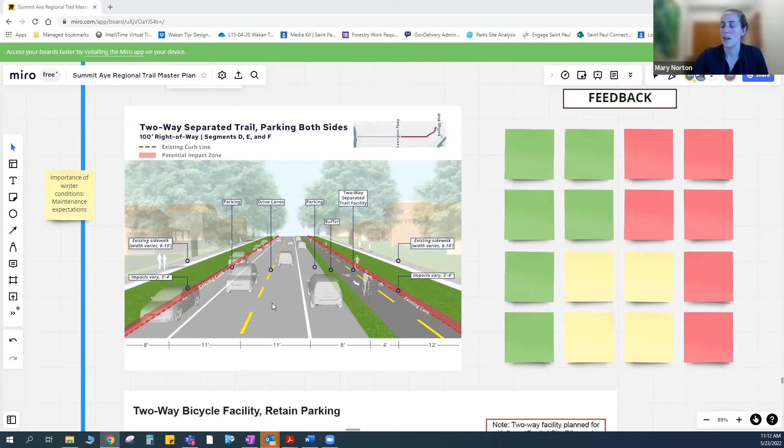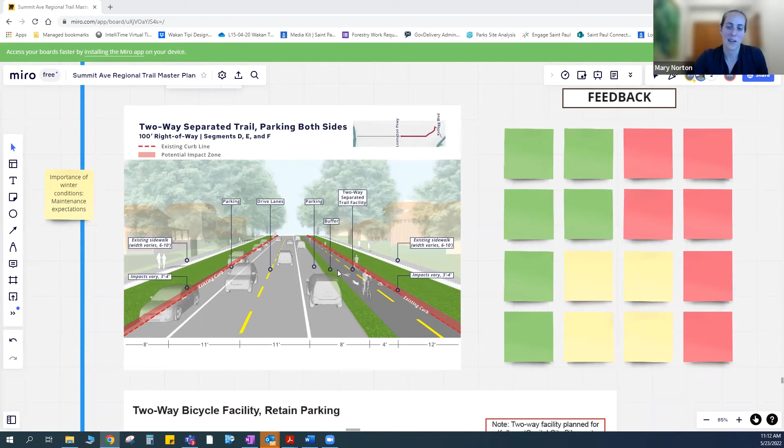For sure, and I think it's an important logistical piece between public works maintenance and how the logistics of clearing that road happens, and then parks comes through. So it also drives home the importance of that buffer in between, making sure that's adequate. Whatever concepts we're looking at, whether it's a two-way or a one-way, that needs to be sufficient for both, in order to meet those expectations that we have a facility that's cleared year round. So yeah, very good point.

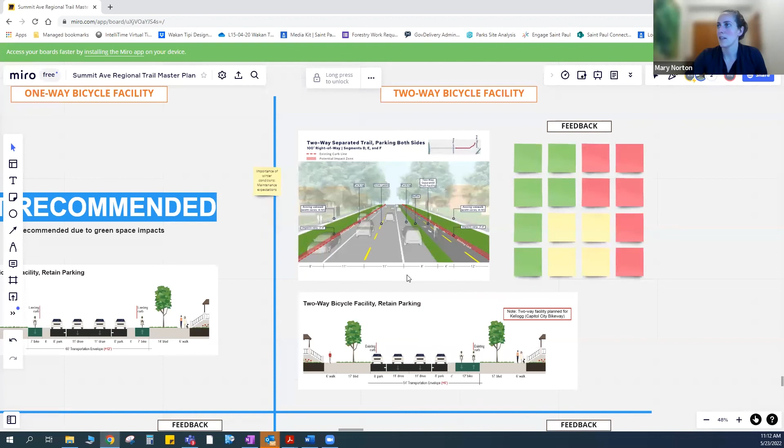You mentioned implementation. Coming back, it sounds like both groups maybe didn't quite get to the 100-foot, probably a lot of similar themes and concerns. Obviously it's more narrow or more constrained, but it's also a segment slated for reconstruction in 2023. So this would be a good time to talk about implementation. Was there anything, Maddie, in your group? You touched on it, and in ours we talked too about whether or not multiple facility types would be preferred in the corridor. Would that need to happen? Could you have a one-way where it's appropriate, or a two-way? Did anything like that come up in conversation?

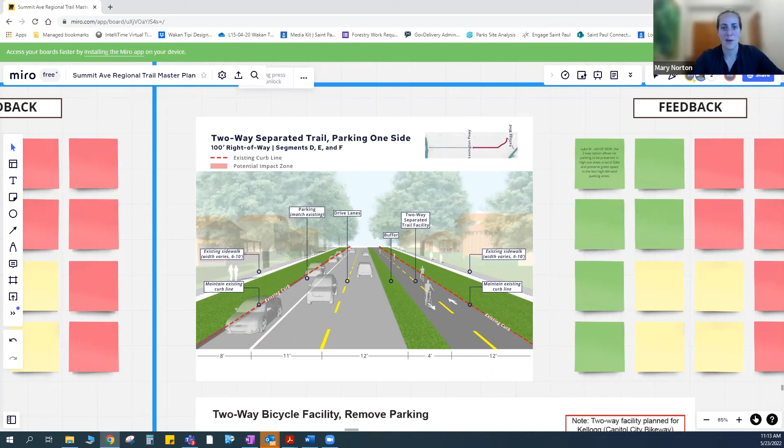I think we talked about the importance of continuity where you can, but recognize impacts are also really important. We had a comment come up early on, or a question of just, are we looking at these in separate segments, but are we ultimately looking to identify one type across the entire project extents? And our comment back was just that we're still exploring that currently.

From what it looks like currently, we could potentially switch trail types if we needed to, but likely that wouldn't occur within that 200-foot right-of-way. Looking at the transitions of how those spaces would connect, it would be pretty challenging to switch trail types in those segments with the medians. If we needed to make a switch from one-way to two-way, we could potentially do that between the no-median to the median conditions, knowing we're making that switch at a signalized intersection, which might provide some opportunity to move people around safely where they need to get to.

Got it, that is helpful. I know implementation and how this gets rolled out over time is also a big part of decision making and style of facility. We think about how a segment gets constructed. There will be existing conditions that exist for a certain amount of time, and we want to make sure we can do that as comfortably and as seamlessly as possible over time. So that is something certainly to consider in whatever facility type is proposed.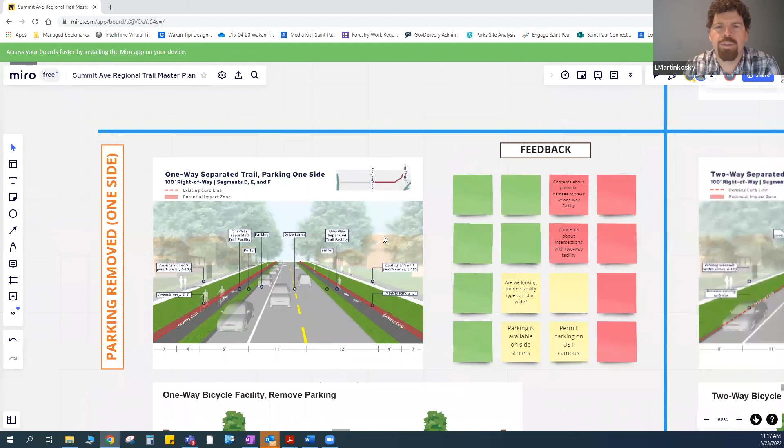Karen, this is Luke with the Watershed District. I just want to reflect a couple things you said back. The campus, UST students aren't allowed to park in that area - that's permit parking throughout the day, so any removal of parking would not affect the university in any appreciable way, as you said. Second, I mentioned this in the chat to Maddie - the two-way facility would allow some preservation of parking in the high use area, the Dale Street area. That seemed to be the only area where there was a high demand for parking, so that's to me the only area where parking preservation should be prioritized in any way.

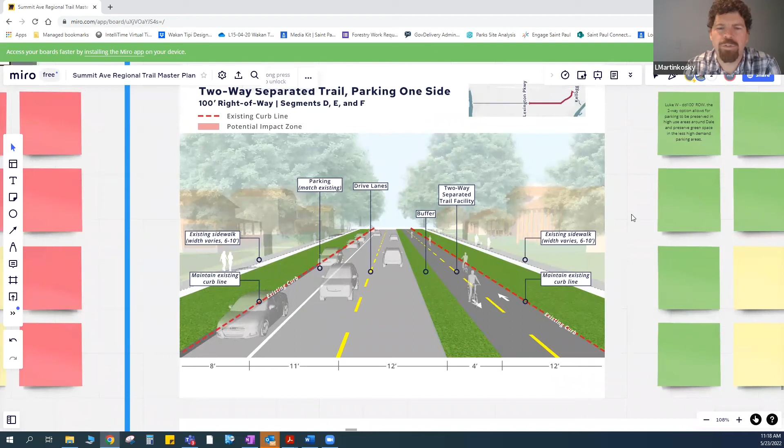There's a lot of multifamily apartment buildings there, and so if you did a two-way, then you could have parking maintained and have some green space impacts in that area. And then for the rest of that right of way, just remove parking in a single location on a single side and still have the two-way with minimal green space impacts.

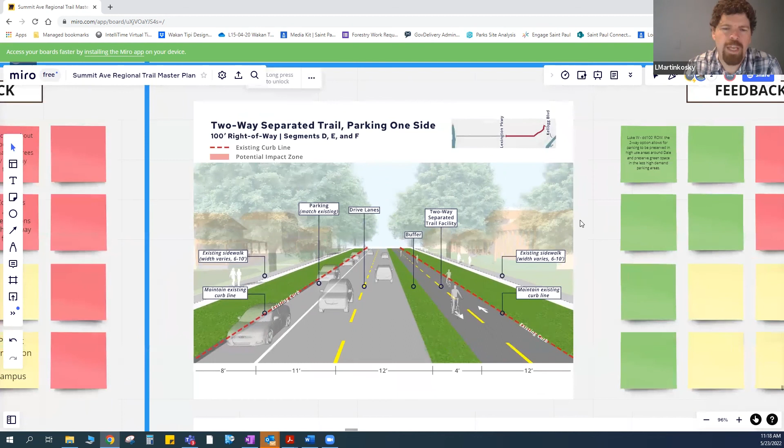And then finally, I think there is a lot of concern about safety at the intersections with the two-way. Karen's idea about having fewer intersections is, I think, a really good one - fewer uncontrolled intersections. And then a change in signalization might address that concern. If there's a separate bike signal, then there's not going to be any conflicts, because bikes will go and cars will be stopped, and then cars will go and bikes will be stopped.

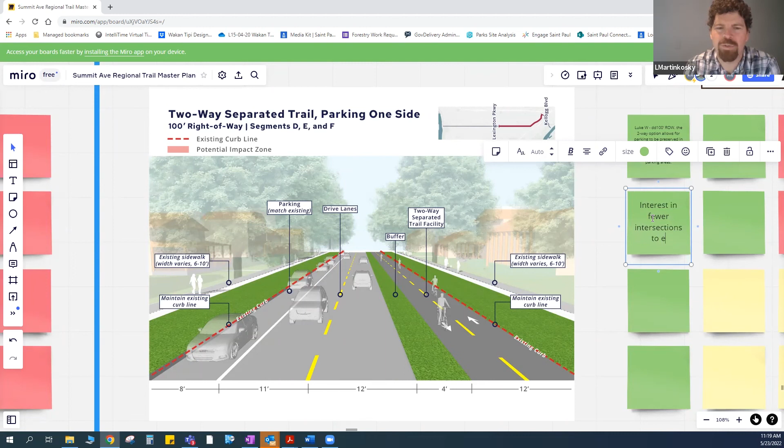I know we have about 10 minutes left, so I want to make sure, if there are other comments here on the 100-foot right of way, we don't anticipate having all the answers after this. Of course, there will be a follow-up survey after this meeting, so we'll have about a week to think on that and share thoughts.

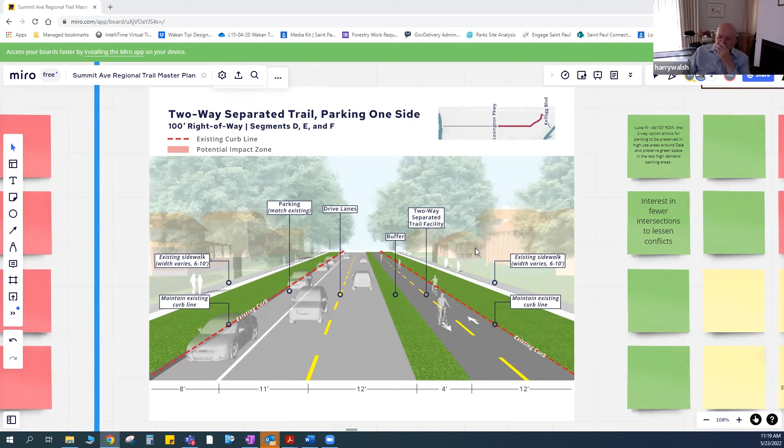Yeah, this is Sarah. I just thought it'd be important to clarify Karen's perception of just the houses that are important here. I think the city of St. Paul and Mary and your group understand that the National Register district includes, and you talked about that at the very beginning, it's a district, so it has many components.

It's the houses, it's the rhythm of how things are laid out, from the street to the curb to green space, sidewalks, setbacks of houses, all of that. And the landscape is contributing to the historic district. So I think that's an important thing to remember here. And that's all been talked about in our group, and the symmetry. A little bit more ways to go on that, but it's important to clarify that.

Thank you, Sarah. I appreciate that. I know all of these concepts kind of show a buffer or a green buffer. Coming back to kind of the pattern in the landscape, would priority say if that were put in, is the balance or the symmetry created kind of that defining piece? Like, could you move forward? Again, I know these are pretty high level ideas, but this idea of introducing new green space as a good thing, right? Of more park or more parkway.

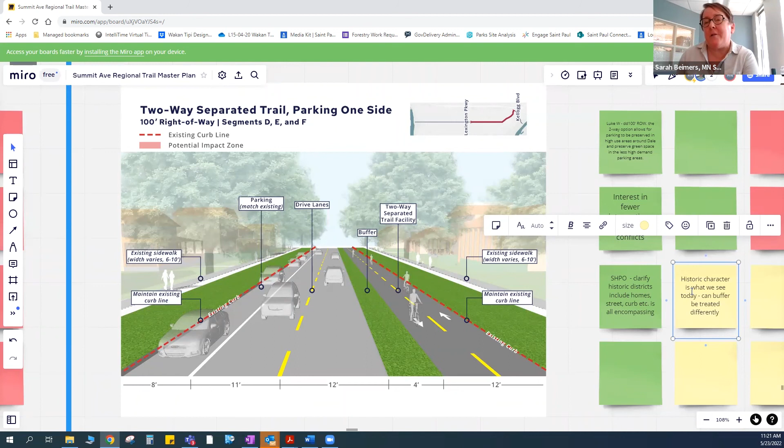Yep, we talked about that. Yeah, it's going to kind of depend on which segment you're in, and sort of reiterating what is the historic character is what we see today. The historic character, of course, we know the roadway has been modified over several decades, but does that asymmetry, or can that buffer be treated in a different way that acts like green space, but maybe doesn't look like an additional green space? I don't know. Maybe there's other treatments that can be used that behave ecologically that way, but may not look like additional green space to counteract that asymmetry that you're trying to avoid.

Yeah, I agree with Sarah in that. And I think it is hard to get too specific at this point, but like with what we're looking at on the screen right now, this is an easier one to distinguish in terms of, the existing curb is staying where it's at. So it's preserving that ratio. You aren't introducing a new kind of green space buffer, but that could easily be interpreted as not being part of the historic landscape of Summit.

So like this scenario is a little bit easier than some of the other ones we saw, where it's building out the existing green space. And especially when we're not having that symmetry as well, because one side might be excluding parking and having a two-way, and another one might have different ratios on the other side. So it's a little imbalanced. So just something to think about.

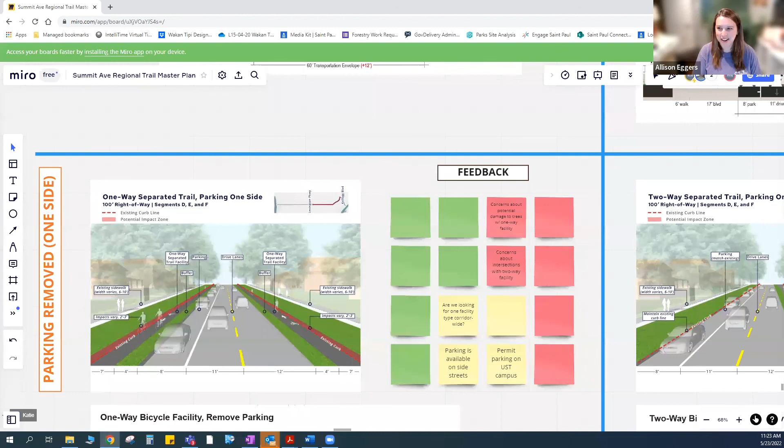I think every post-it that's going to have my name on it is going to say something about green space and balancing. So I'm sorry about that, but no, that's a good thing. That's what we want to hear. And I will just plug, since this is still the brainstorming time of this whole project, that if you ever want to move this to Grand and get people to go on Grand Avenue to support economic development from the business side of things and add green space over there, you will not hear from me at all. So if you want to avoid me, go to Grand Avenue.

Fair enough. Fair enough.

All right, all great comments. I will let this be kind of a last call for comments at this moment in time. Again, there'll be a follow-up survey here, but I'll pan back to the last slides in our presentation.

Mary, is there any plan to do, and maybe this already exists, maybe I missed it, like almost an audit or an assessment of potential tree loss under these 7 or 8 different alternatives? If we're debating between 5 feet versus 8 feet, is there anything we could look at and say this is how many trees would be lost, or this is how many could be gained? Yeah, at a master plan level, not likely.

I think when you get down to the next step, that would be design and engineering, which is a ways off, to get to that level of detail of where impacts might be. So as a general approach, we're looking at a tolerance of moving that curb and what those potential risks are, but I don't know that we'd get that granular at this level. I think we'd have to identify that at a preliminary design kind of facility.

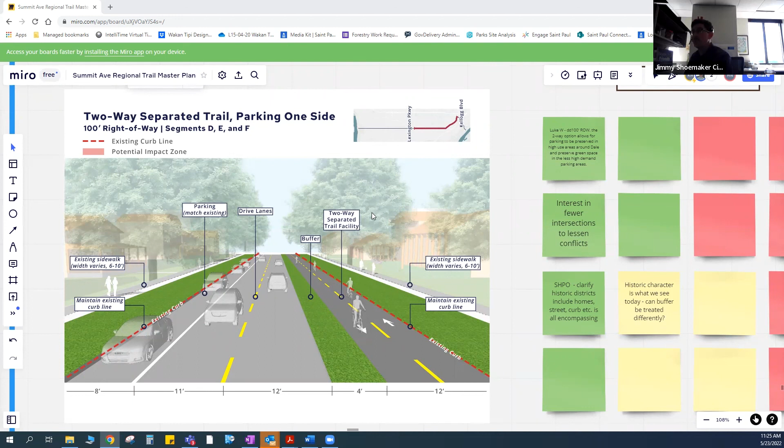So is that assuming then that all of the alternatives currently considered would have insignificant tree removal?

I'd be happy to jump in here. It's hard to know. We've sent over some data on critical root zones and structural root zones, but those can vary by species. So it's hard to know at this point.

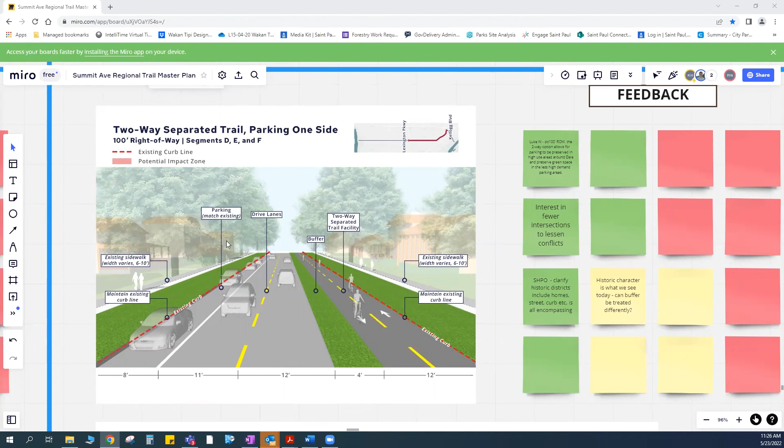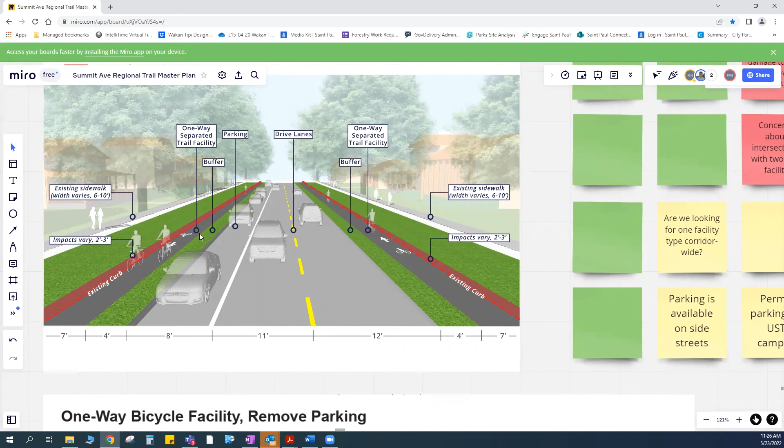But certainly when I see changes of 2, 3, 4 feet in construction, that tells me 3, 4, 5 feet with a good contractor, which gives me quite a bit of concern on like a 100-foot zone. I could see the tree impacts being quite significant. It's just a matter of what is that nuance, and without doing a deeper dive into where those trees exist, the species, the cut on each one, it's hard to know. But seeing impacts like this, it's concerning.

Thank you for that clarification, Zach. I appreciate it.

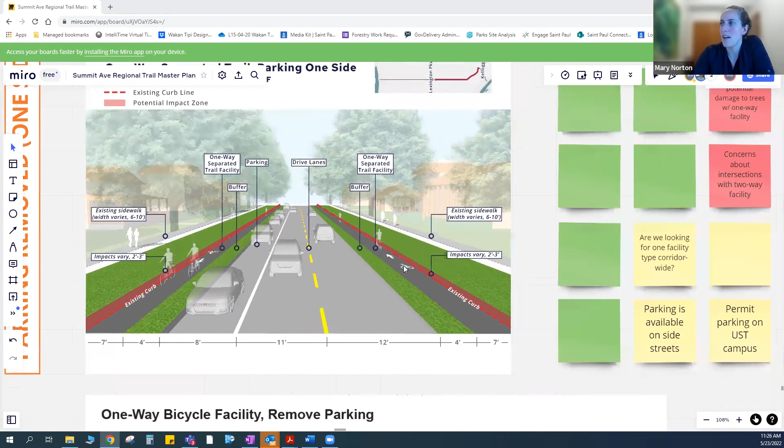With that, I am going to transition here to our last slide. Okay, and we only have a few minutes left. So I think we went through the design benefits and drawbacks of each.

I think we're certainly paying attention to those existing curb lines. We also want to think high level about creating those park experiences or maintaining the park-like experience, and where we can enhance more pedestrian amenities in the corridor, just to really build up that priority of park-like space, and kind of shaping that public realm that exists now, but how can we make that even more of a park-like experience into the future with these facilities.

All right, we did our breakout groups. I think for next steps, I mentioned a follow-up survey. So after this meeting, the recording and the slides will be posted to engagestpaul.org. So that is available.

And then I will send a follow-up survey to participants here just to weigh in again on some of those pros and cons. You'll have slide attachments for a link to find those, and we'll give a week to get that feedback back.

May 25th, we have our design advisory committee, Wednesday night. This is a group of community leaders and representatives throughout district councils and various stakeholder groups along Summit. So same presentation, same exercise, but we'll hear from community members at that time.